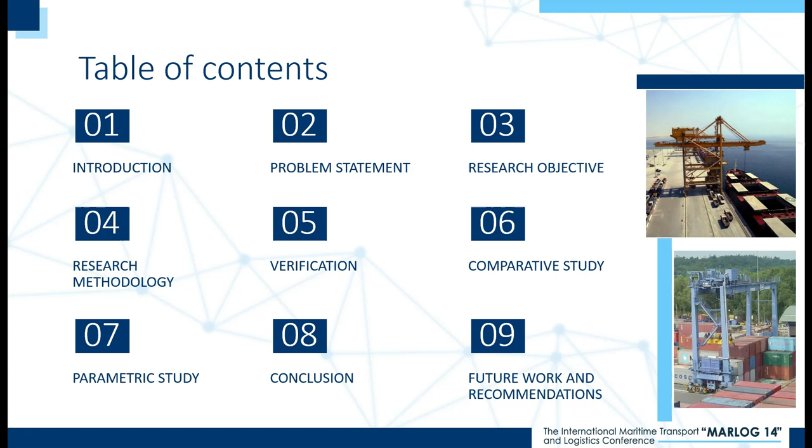As an introduction, let's talk about structural strengthening. It's an effective and feasible approach, especially for marine structures. It can enhance the structural capacity of these marine structures to meet the increasing demands of the marine industry, while also facilitating the repair of damaged structures after an incident like a ship hit or natural disasters like seismic events.

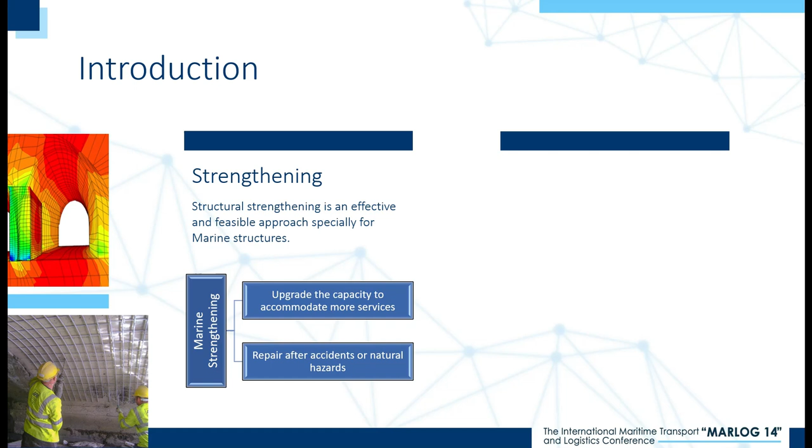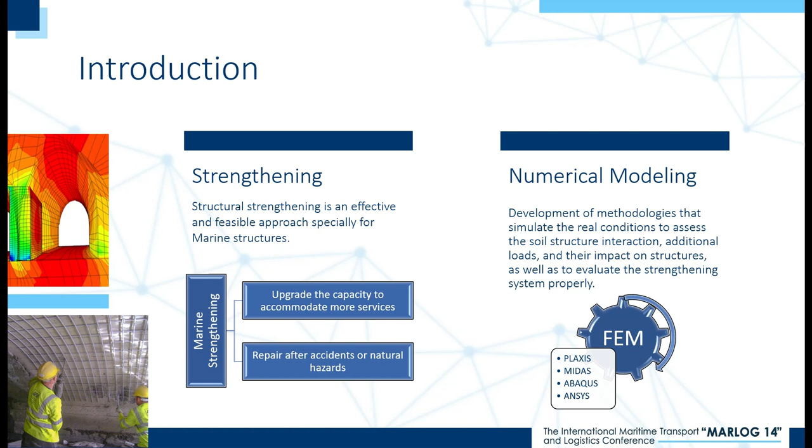In this context, developing methodologies that can simulate real-life conditions to improve the reliability of assessment when investigating the soil structure interaction, load increment, and the suitable strengthening system is very important. One of the optimal approaches in this regard is numerical modeling using finite element software such as Plaxis, Midas, Abaqus, and ANSYS. Now, let's discuss the problem at hand.

Maritime transportation is the lifeblood of global trade. As the cargo grows, the size of the ships also increases, necessitating the upgrading of port infrastructures. This requires deeper quay walls, bigger cranes, and more storage space. All of this increases the loads on the quay wall, and here is the challenge.

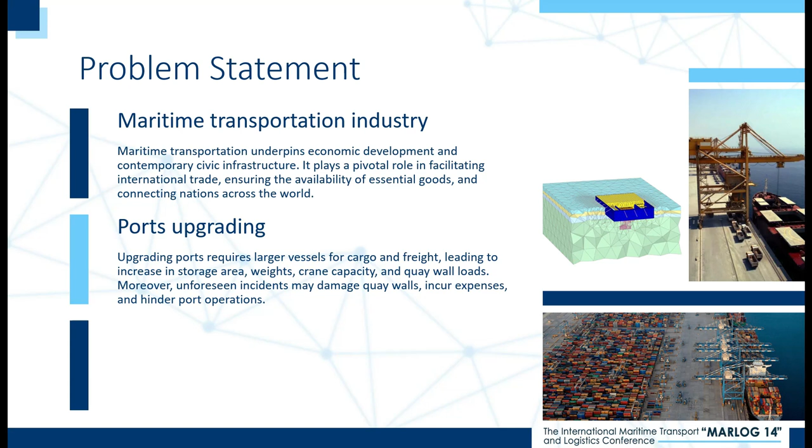Quay walls interact with the soil in a complicated manner. If we don't account for it adequately, we risk structural problems, expensive repairs, and operating downtime. And here is where our research comes in.

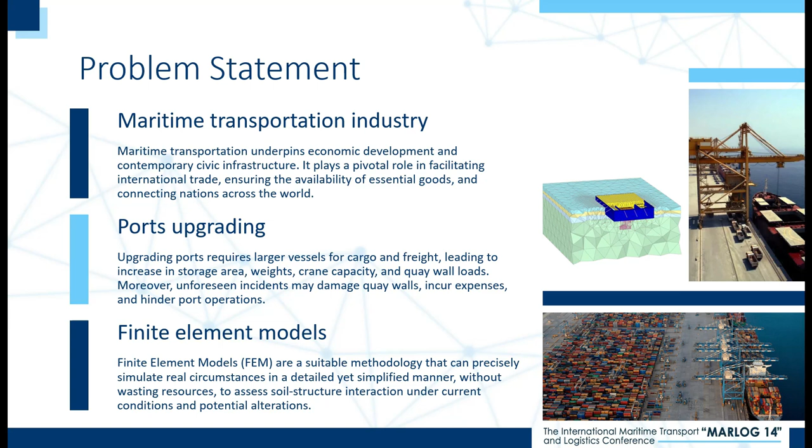To meet future demands, we set out to investigate how these quay walls behave under extra loads in line with various types of soil and material models. So we implemented finite element models. Finite element modeling is a sophisticated computational tool that allows us to simulate real-world conditions in a virtual environment. This will lead us to our objective.

Our research objective is to tackle this problem by assessing the soil structure interaction for an existing quay wall, which needs to be upgraded to accommodate the additional loads caused by the increase in the depth of the quay wall and also by the crane load increment.

Finite element models were developed to verify the case study and analyze the impact of various material models along with different soil profiles on the mentioned case, in addition to performing a parametric analysis on the increment of the crane loads and the deepening of the quay wall, to achieve this goal.

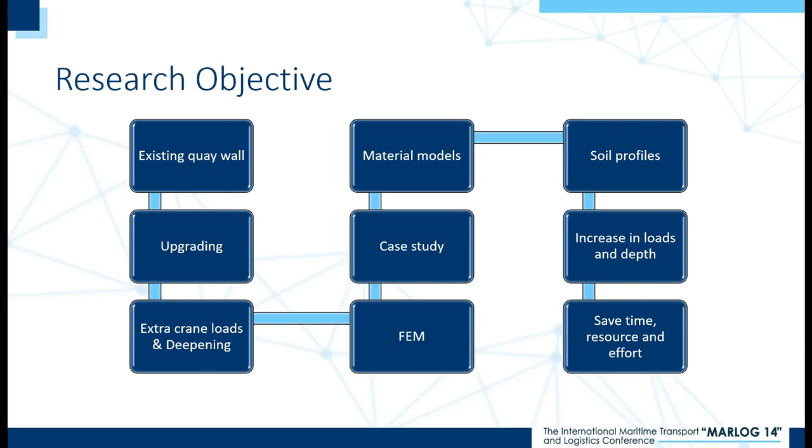Finite element models conserve time, resource, and effort. Think about it as a digital lab where you can test these quay walls, how they respond under different loads and different soil conditions, without the need for costly physical experiments.

To explain more precisely, the research methodology is built on three key components. The first is a verification approach, in which we use two case studies to verify: a quay wall in Rotterdam, which provides field measurement and numerical model results, and a quay wall in East Port, which provides results from two research studies based on two different soil profiles and two different material models.

The second approach is a comparative analysis for the East Port quay wall, which includes comparing between different material models within the same soil profile, as well as comparing different soil profiles within the same material model, to figure out the optimal material model that we can use in the third stage, which is the parametric study.

Parametric study for the crane loads and the wall depth increment in case of drained and undrained conditions, to figure out the increment impact, so we can select the appropriate system for strengthening or upgrading.

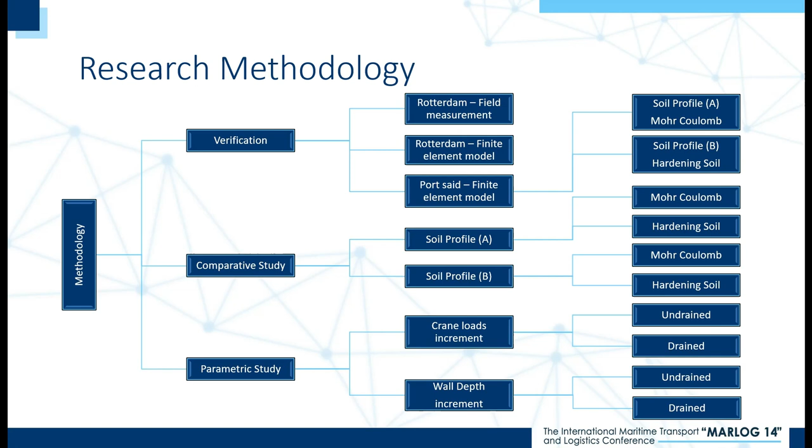We employed Plaxis 3D to create detailed models, but before we could trust our models, we needed to verify them against real-world data.

For the deep sea quay wall at Rotterdam, cited in Muhammad Kamal 2021, the system of the quay wall consists of king piles as a front wall and sheet piles for the back anchorage system, in addition to a number of rows of spaced piles.

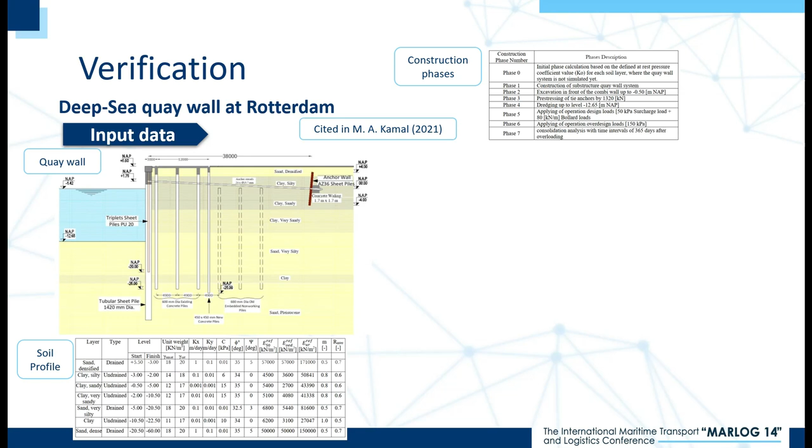The soil profile and construction phases were as shown. Here are our results from Plaxis 3D.

The total soil displacement is reported in the published research as 132 mm, while our model displayed 128 mm, resulting in a discrepancy of around -3%.

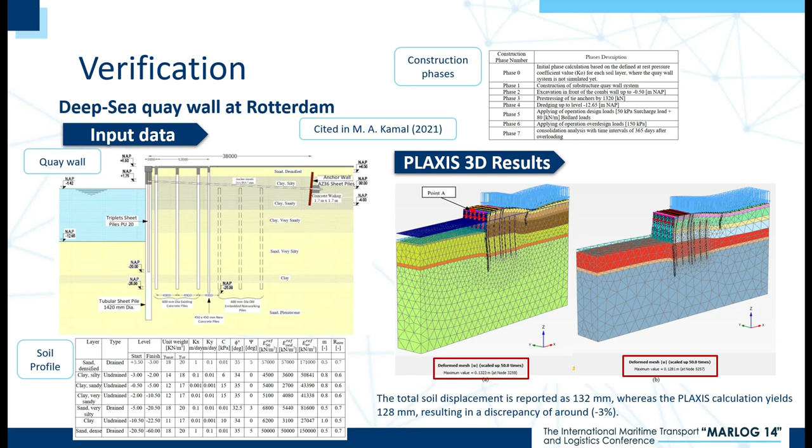In terms of horizontal displacement, the published value was 59 mm, while our model displayed 53 mm, indicating a discrepancy of nearly -9.5%. The following table shows a comparison for the top horizontal displacement between the field measurement versus the numerical model results.

These are results from Muhammad Kamal and from our models. For example, in the overloading phases, the computed displacement is 72.66 mm, whereas the published value is 72.07 mm, resulting in a discrepancy of around 0.8%.

Regarding the field measurement, the displacement was 77.84 mm, indicating a difference of nearly -6.6%.

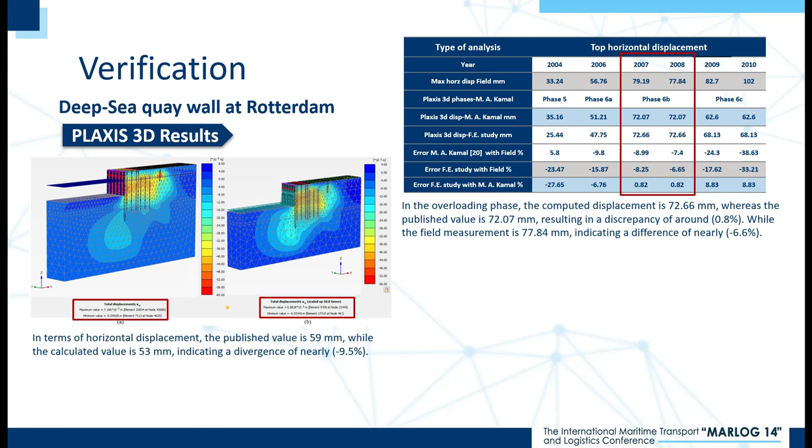The following chart displays that our results lie between the maximum and minimum measured values from the field measurement, and are also closely aligned with the published research results.

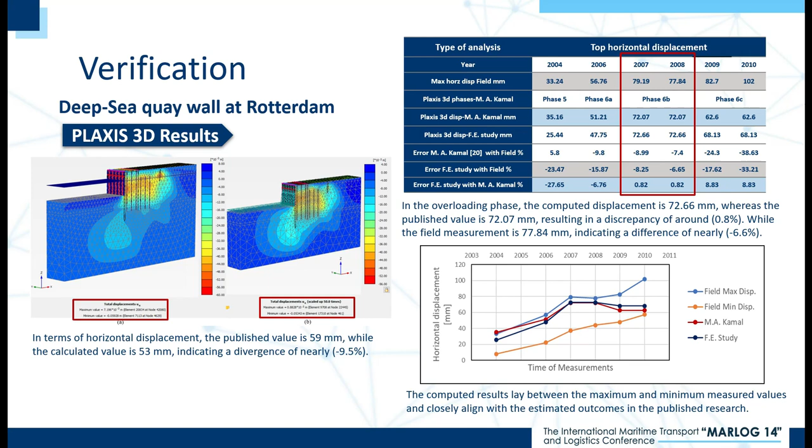For the East Port Said Port Diaphragm Quay Wall Container Terminal, the quay wall system consists of a concrete T-shaped diaphragm barrette wall for the front and back wall, in addition to 2 rows of barrettes.

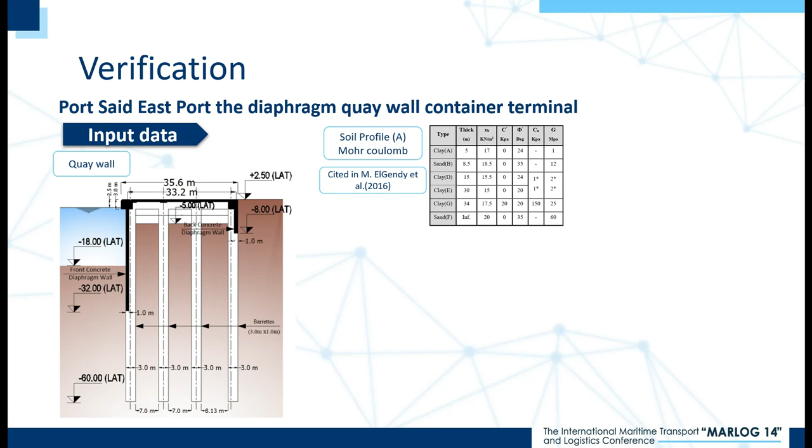The soil profile shown is cited in ElGendy et al. 2016, and was defined with the Mohr-Coulomb material model; we have designated it soil profile A.

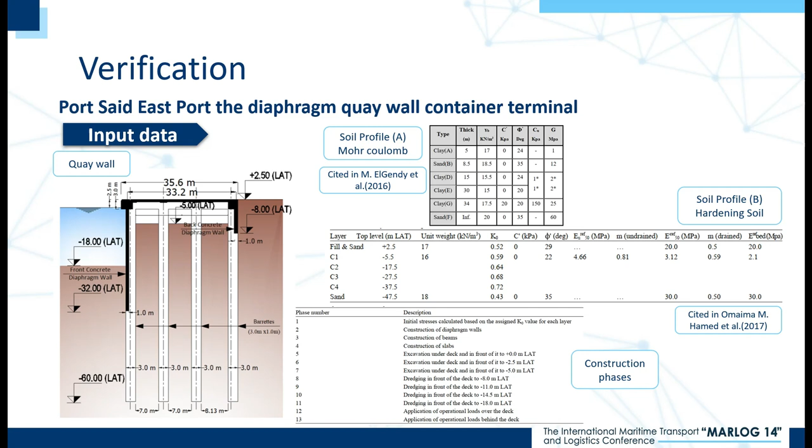The other soil profile shown is cited in Omaima Hamed et al. 2017, and was defined with the hardening soil material model; we have designated it soil profile B. The construction sequences are divided mainly into construction, excavation, dredging, and applying loads.

Here are our results for soil profile A. Regarding the horizontal displacement, our model displayed 23 cm, while the reported value was 18 cm, resulting in a discrepancy of nearly 27%.

For the normal force, our model displayed 15200 kN, while the reported one was 14600 kN, resulting in a discrepancy of around 4.1%.

Finally, for the bending moment, our model resulted in 15600 kN·m, while the reported value was 17000 kN·m, resulting in a variance of around 8%.

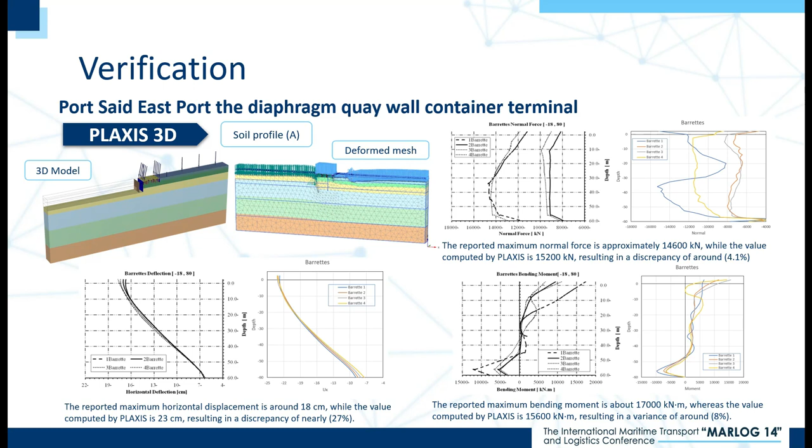Here are our results for soil profile B. The following tables show a comparison between Omaima Hamed's results and our model's results for the phases, in cases of drained and undrained conditions.

For the undrained condition, the majority of the phases result in discrepancies below 5%, which is an accepted margin of error.

While for the drained condition, the majority of the phases indicate discrepancies below 10%, which is also an accepted margin of error.

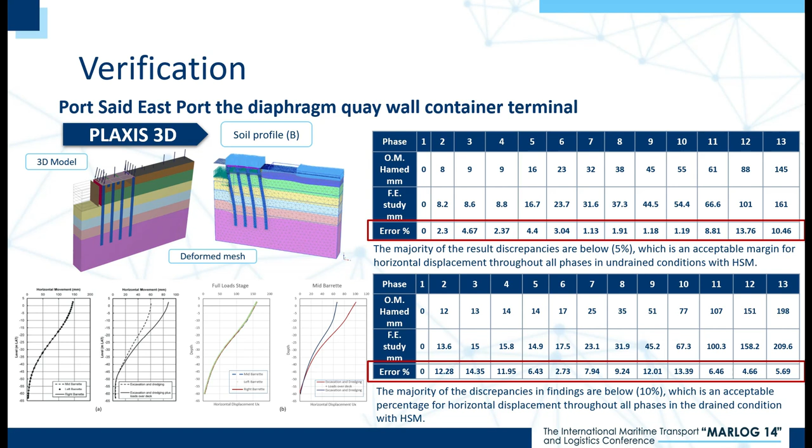Now, let's move on to the comparative study.

Proceeding with the East Port Said diaphragm quay wall container terminal, in this step we turned soil profile A from Mohr-Coulomb material model to hardening soil material model, as well as for soil profile B, we turned it from hardening soil material model to Mohr-Coulomb material model.

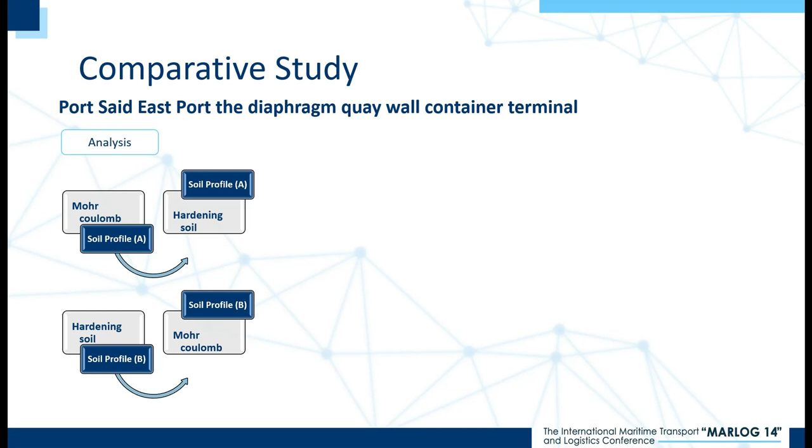Then we created our 3D Plaxis models to compare between the different material models within the same soil profile, for soil profile A and B, as well as comparing between the different soil profiles within the same material model, for material model Mohr-Coulomb and hardening soil.

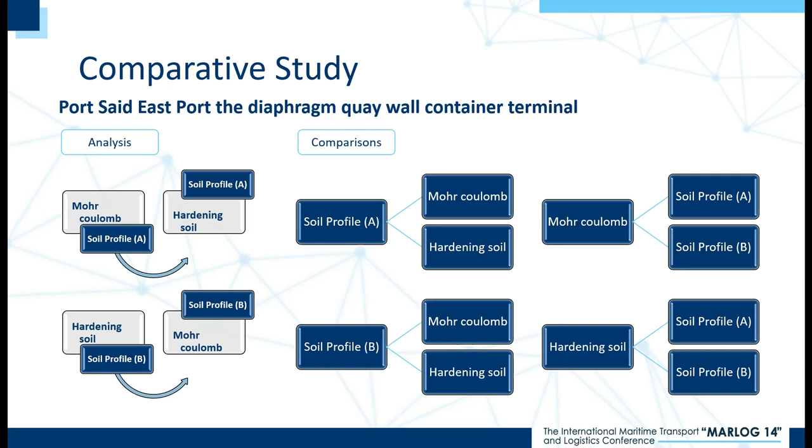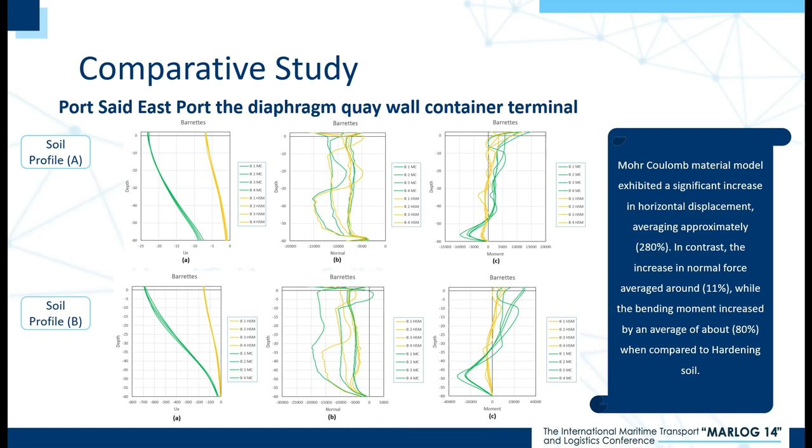What did we find? Here are our results. Mohr-Coulomb displayed a significant increase in horizontal displacement, approximately 280%. In contrast, the increase in normal force was around 11%, while the bending moment increased by about 80%, when compared to the hardening soil material model.

And here are our results for the soil profiles. Soil profile A displayed a relatively minimal horizontal displacement, approximately -65%, while for the normal force, it demonstrated a decreased value of around -15%, and for the bending moment, it showed a reduced value of about 30%.

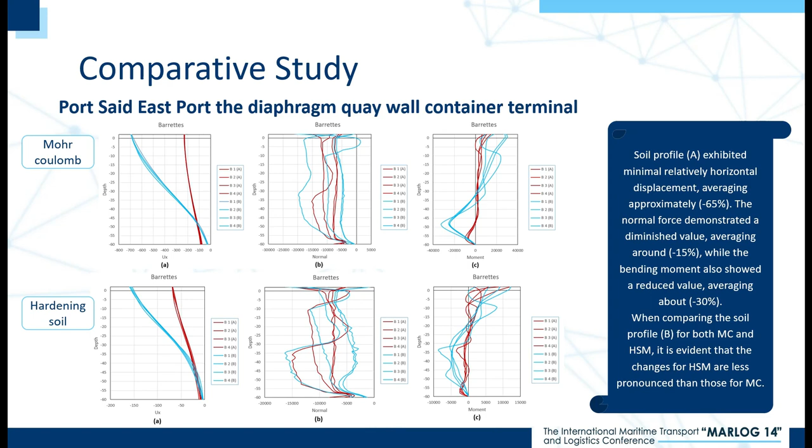From all of this, it's evident that the changes for the hardening soil material model are less pronounced than those for Mohr-Coulomb, and for that we will be proceeding with the hardening soil material model in the next stage.

Next, we will cover the parametric study, proceeding with the East Port-Said diaphragm quay wall container terminal. What happens if we increase the loads on the quay walls?

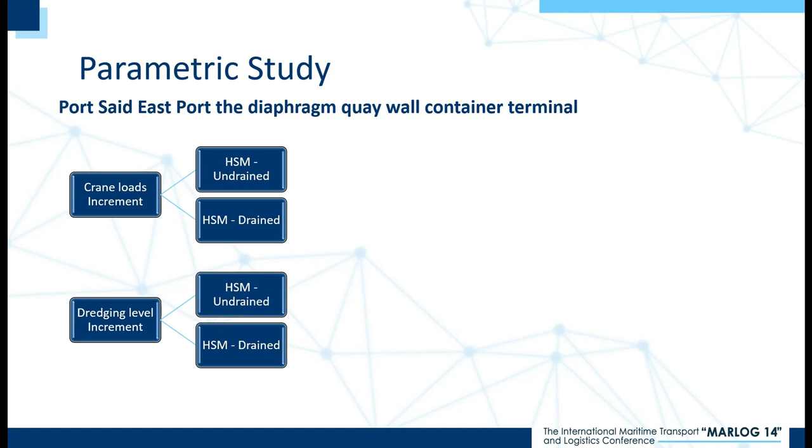To answer this question, we developed two vital trials on the increment of the crane loads and the dredging level, for the drained and undrained conditions, using hardening soil material models. The following tables show us the increment methodology.

For the crane loads, we increased the loads from 80 ton per meter to 160 ton per meter, which is doubling of the load. Also for the horizontal load, we increased it from 8 ton per meter to 16 ton per meter. Regarding the dredging level increment, we increased the level from -18 to -24, which is 6 meters beyond the original depth.

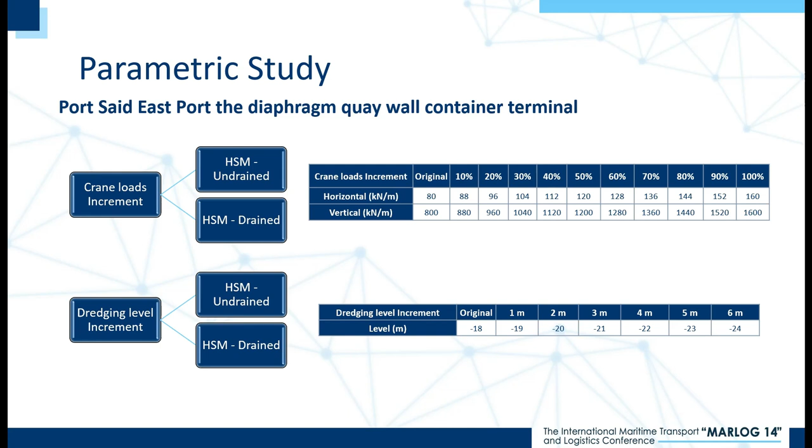What did we find? Here are our results. For the crane loads increment, when the crane load increased from 80 ton per meter to 160 ton per meter, which is doubling of the load, this leads to an increase in the horizontal displacement by about 26%, and for the normal force by 30%, while for the bending moment it was 22%.

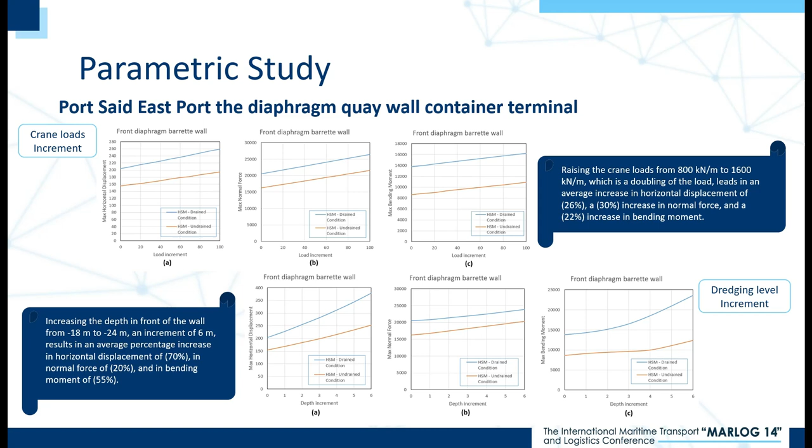Regarding the dredging level increment, when we increased the depth or the level of dredging from -18 to -24, which is a 6 meter increment over the original depth, the horizontal displacement increases by 70%, and the normal force increases by 20%, while for the bending moment the increase was 55%.

So, what can we acquire from all of this? Regarding the deep sea quay wall at Rotterdam, most of the results are within the accepted difference with the calculated results and the field results published by Mohammed Kamal.

With an average difference within 10%, which is an accepted margin of error, and this difference was due to the different versions of software and related to the available data from the authors.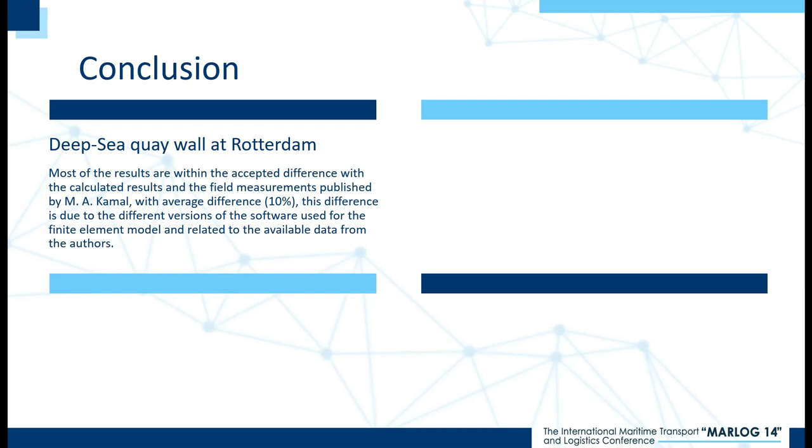Regarding the Port Said the diaphragm quay wall, most of the results are within the accepted difference with the calculated results published by O. M. Hamed. Most of the results indicated discrepancies less than 10%, which is an accepted margin of error.

And this difference is also due to the different versions of software and related to the available data from the author. In addition, this indicates that the hardening soil material model is considered the most effective material model when dealing with clay soil.

For the comparative study, the results indicate that the Mohr-Coulomb material model displayed higher results than the hardening soil material model, especially for the horizontal displacement, showing that the Mohr-Coulomb material model is more conservative due to its relative insufficiency in soil definition parameters compared to the hardening soil material model, and that's why we're proceeding with the hardening soil material model.

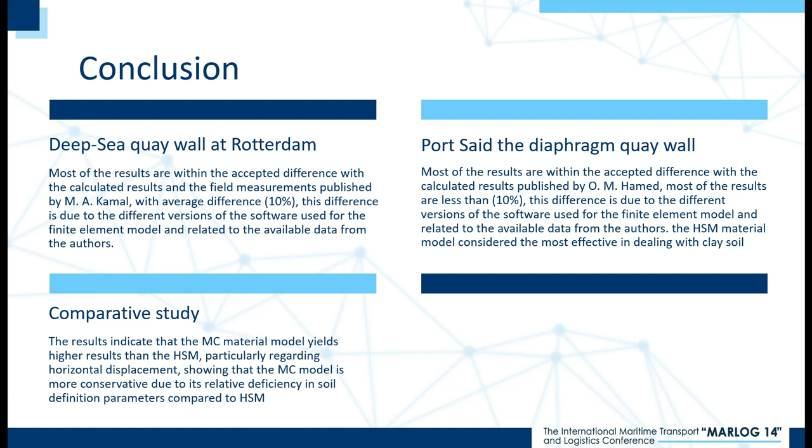Finally, for the parametric study, the results display that deepening in front of the quay wall has a larger impact than the increment of the crane loads.

For instance, the bending moment escalates by 22% when the crane loads are doubled. However, it grows by 55% when the deepening reaches 6 meters beyond the initial depth.

So, this research gives engineers the tools they need to design stronger, more resilient quay walls, and to select the appropriate upgrading or repairing system based on the impact of the different factors, to make these quay walls able to handle or accommodate future needs.

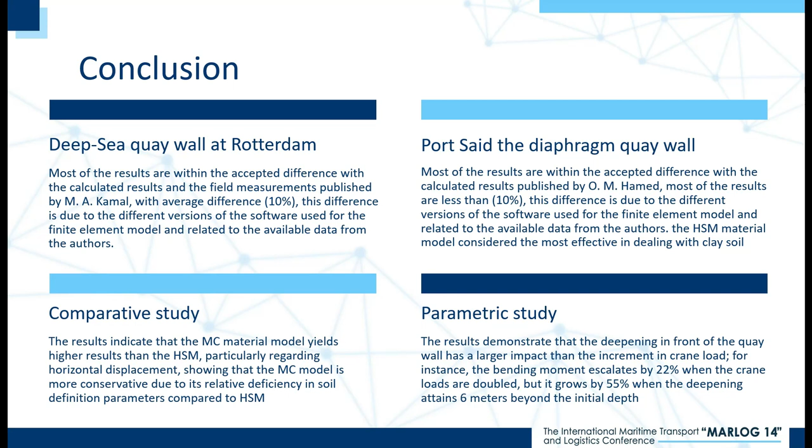But our work doesn't stop here. Looking ahead, we want to explore new ways to strengthen the quay walls to accommodate these extra loads or repair after an incident, in addition to comparing these new methods with the traditional ones, to demonstrate the advantage of each of them in a feasibility study.

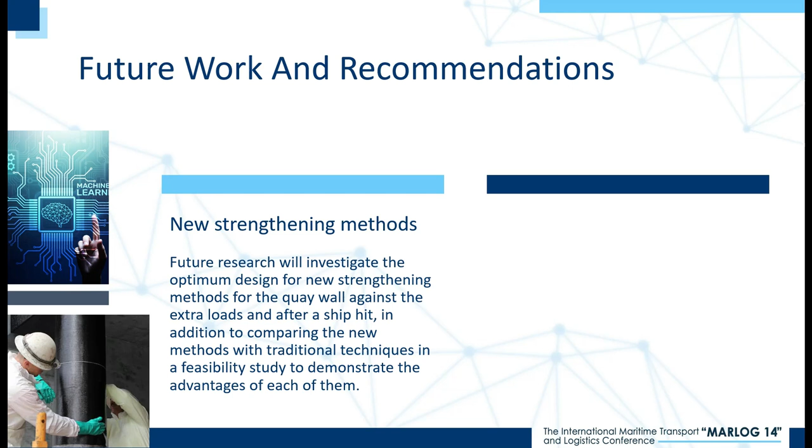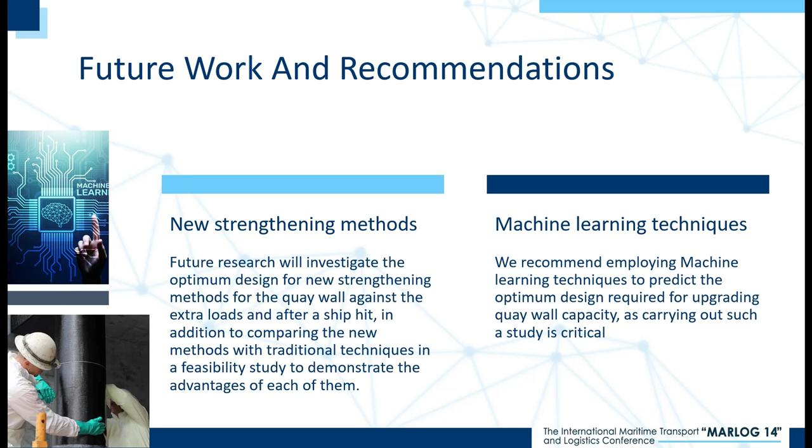Moreover, we highly recommend employing machine learning techniques to predict the optimum design required for upgrading or repairing these quay walls by these new methods, as nowadays AI and machine learning techniques have a large impact in our life.